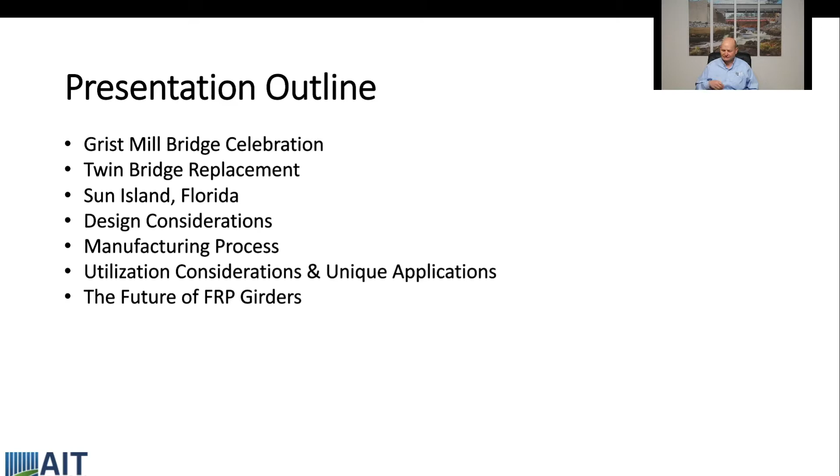Grist Mill Bridge: the celebration for the completion of the project was May 21st of this year, and this is really the first bridge of its kind utilizing the G-beam system, and it was very successful. I'd like to first of all congratulate the University of Maine, as well as the Transportation Infrastructure Durability Center and Maine DOT for their work in advancing this new technology.

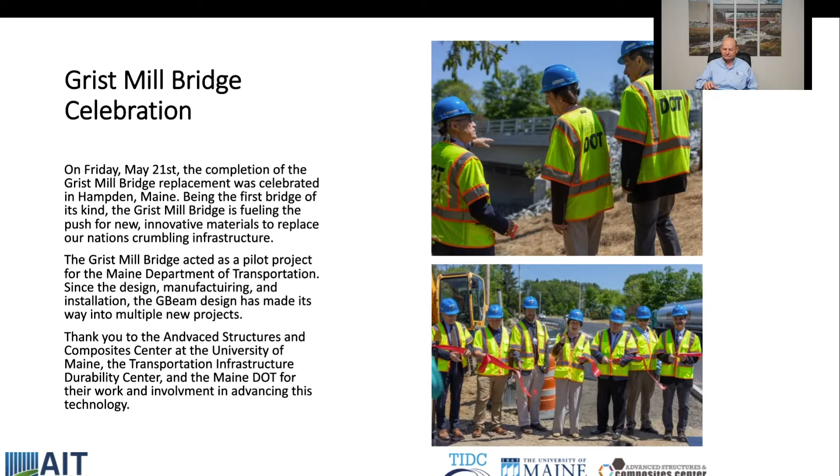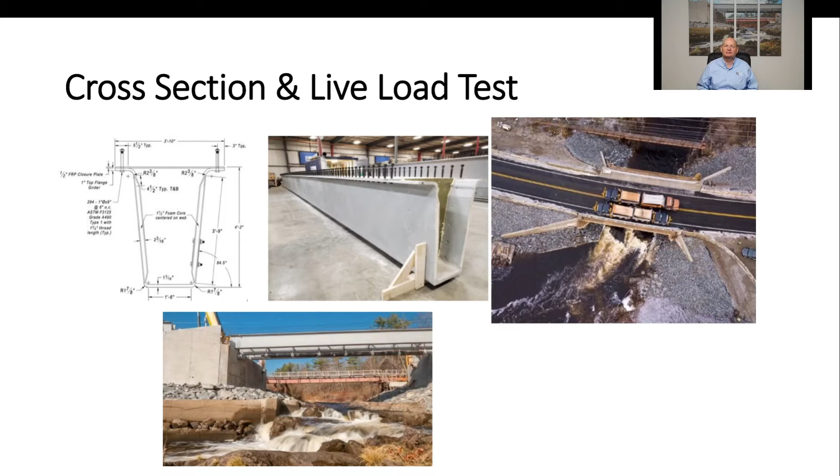Let's talk a little bit about Grist Mill Bridge. Certainly there was a lot of research and development that went in before we started down the road of this first pilot project. As you can see, the girder on the left-hand side of the screen, and then the completed fabrication in our shop here in Brewer, Maine, and then installation at the bridge, and then finally load testing by the University of Maine and Maine DOT. The live load test was very successful, and it led DOT to continue to use these new girders and this new technology. Next.

So the next bridge I wanted to talk about was the second bridge, which is also in Hampden, Maine. It's the Twin Bridge replacement, and it will be constructed this fall. It's under fabrication right now in our shop, and due to be delivered, set in place and open to traffic prior to winter. The span is 53 feet. The depth of the girders is 20 inches, and it's 6 FRP G-beams. We partnered with WSP Consultant Engineers, and the contractor is CPM Construction.

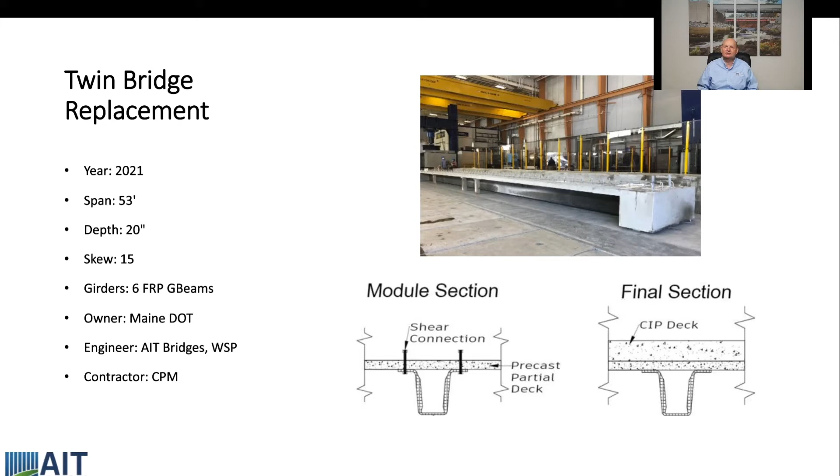This is different than the Grist Mill Bridge. Grist Mill was a cast-in-place deck. This is a precast partial deck, 4-inch partial deck, and then it also will have a cast-in-place deck on top of it. Quite a few advantages to using this modularization concept. And so there'll be modules. They're 53 feet long. A traditional solution to this project would have been using a NEXT beam, NEXT 24F, and the weight of that would be 53, versus the G-beam of 32.

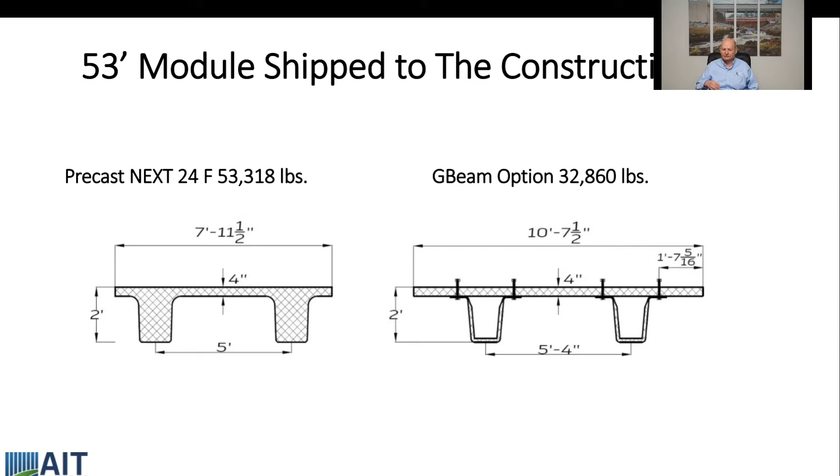The other piece that has changed since Grist Mill was we developed a fabric where we could put multiple layers and stitch the multiple layers together and have less labor involved with laying up the bottom flanges of these girders, which are quite thick, on the range of 1.5 inches, and some of the designs we've seen as much as 2.25 inches thick. And that's the main tension carrying part of the girder.

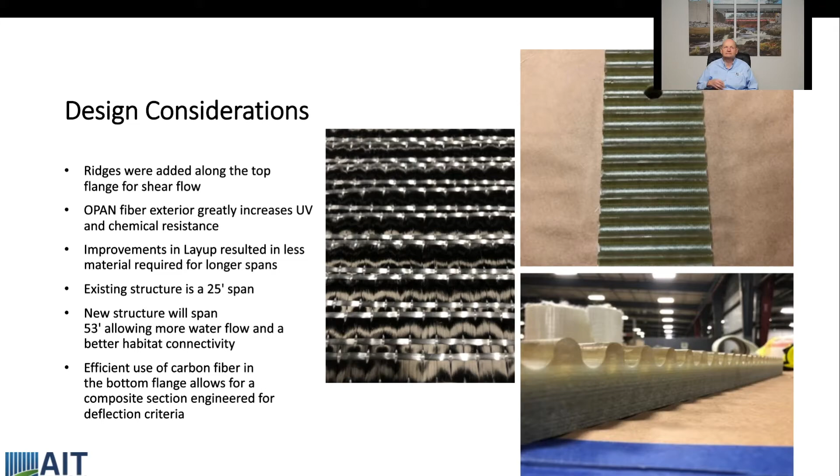Talk a little bit about the manufacturing process. It's a vacuum infusion process. We use a steel mold. Grist Mill was a wood mold. We've since moved to the steel mold, which gives us added efficiency and also a lot more reuses. The glass fiber and carbon fiber reinforcements are layered into the mold, and then it's bagged, a vacuum drawn, and then an infusion is done with a thermoset resin.

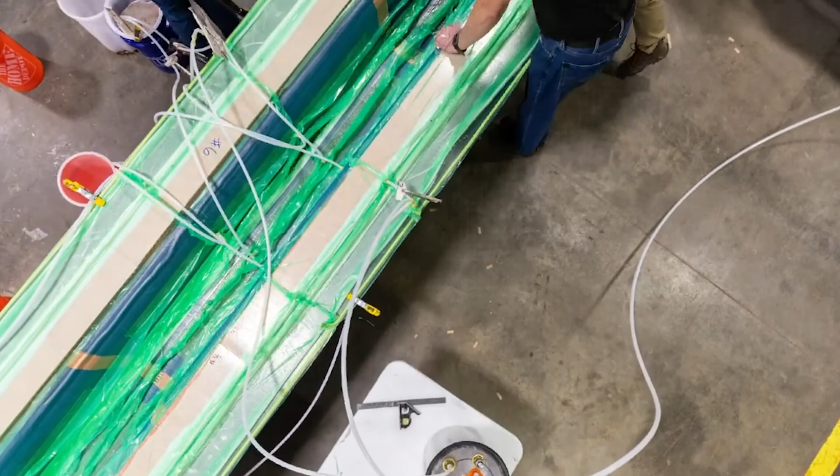Once cured, you pull it out of the mold. You drill your holes for the shear bolts, and we're also doing testing right now to replace stainless steel shear bolts with composite shear bolts. Those are presently under development, and we've done some fatigue testing. The University has done some fatigue testing, and we'll do some more.

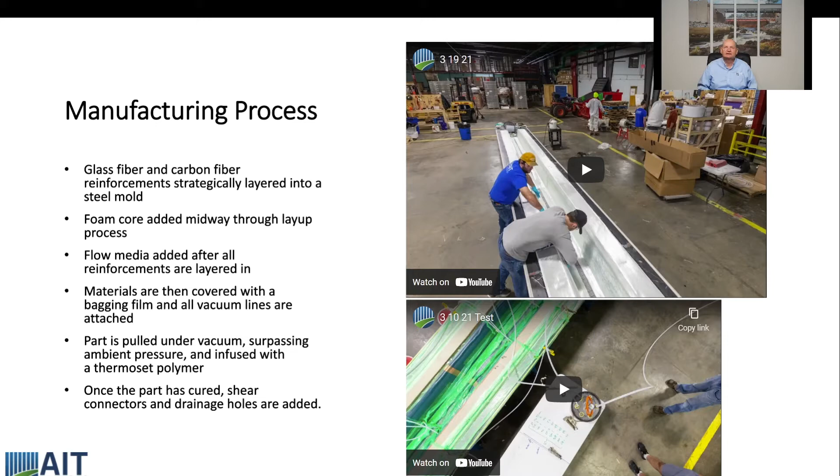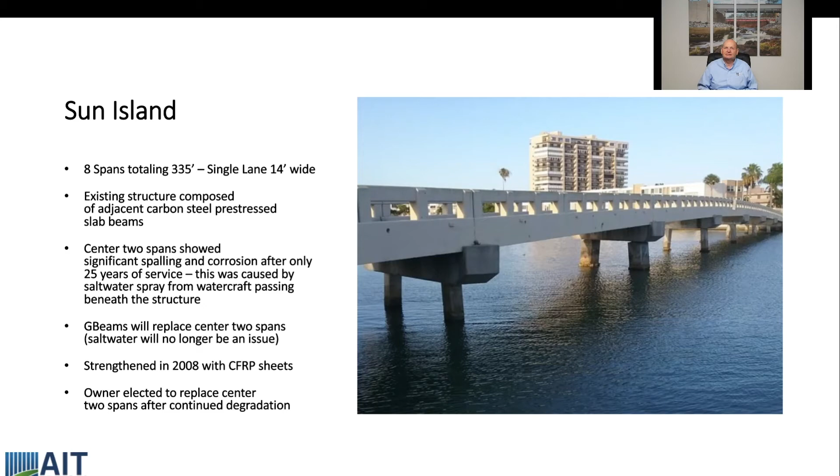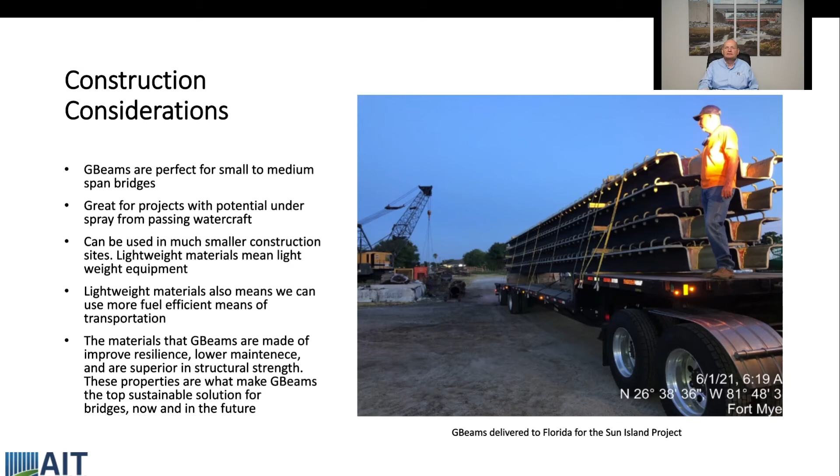We've found a lot of interest out on the West Coast, as well as continuing in New England and certainly within Florida. So we believe a huge spike in demand is coming up.

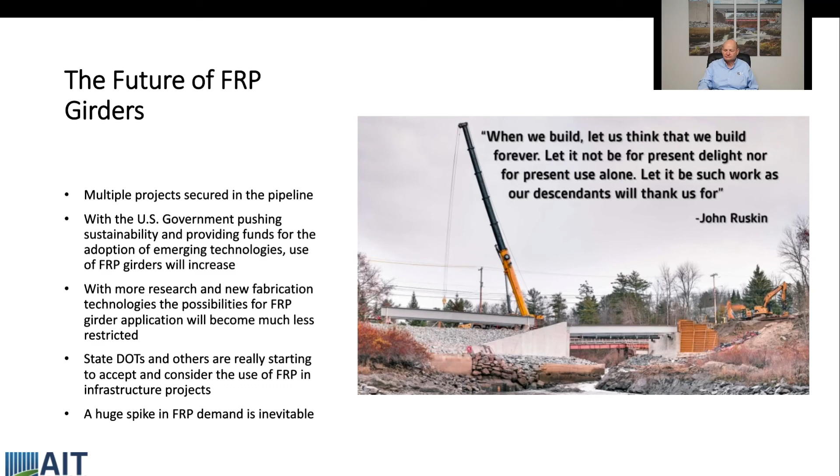So, in conclusion, FRP is easier to ship and certainly lightweight, a big advantage. Corrosion resistant, a big advantage. Anything close to marine waterways, corrosive environments in general, this would be the go-to material. With the application of FRP in infrastructure around the country, we're seeing significant interest and significant projects coming through the pipeline. And I think that with the real push at all levels of government in terms of sustainability and resilience, you'll see that use of the technology will continue to increase. And with that, we'll open it up to questions.